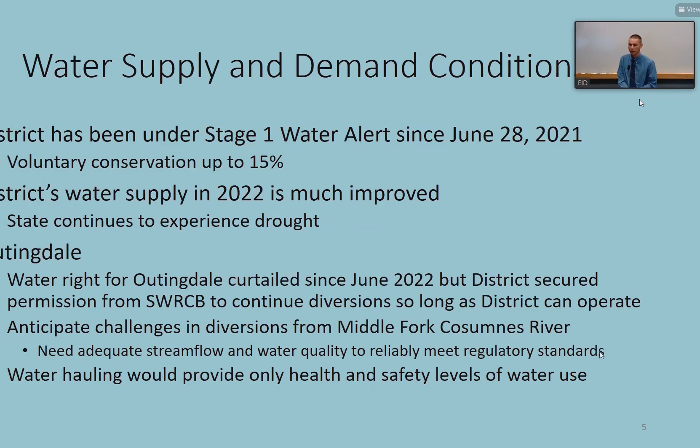So stage 1 alert has initiated public awareness of possible water shortages and encouraged water conservation with a target of up to 15% voluntary demand reduction from 2020 levels. We do continue to make progress towards this goal, and at this time we have sufficient water in storage to meet demands and carryover targets. Next slide, please.

Outingdale, on the other hand, has had its struggle and continues to be at the forefront, as the middle fork of the Cosumnes is its only water source, and there are no flow impoundments upstream. We have no dams or diversions or way to add water to that system. River levels may continue to drop until diversion is precluded. Water quality is the main source of concern at this time, which I'll get into in a few slides. We are requesting the board authorize the general manager to declare a stage 4 water emergency when necessary.

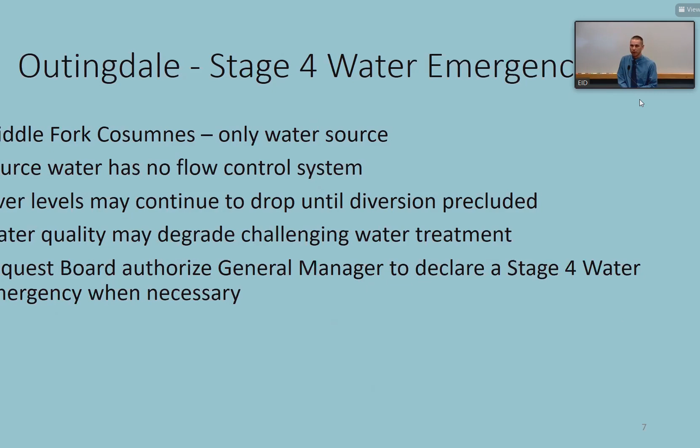Patrick, I was under the impression that the releases from Jenkinson Lake actually could help with this issue. Is that incorrect? Dan, do you want to talk?

Good morning, Patrick. Still getting his mental watershed map oriented. While Patrick's managing the technical aspects, I could talk to the policy level aspects. That's your question, Director Dwyer.

The way that the Jenkinson Lake storage is assisting the district is that, unfortunately, those releases come into the North Fork, and we're on the middle fork of the Cosumnes, so we're one watershed over. But by making those releases, we can continue to divert water that's physically available because there's no intermediary downstream beneficial users impacted by us. Unfortunately, we can't quite push the water through that watershed. So we're effectively trading water, if you will, in accordance with state water resource control. So in effect, we're not helping the Middle Fork, but we're helping further downstream. Exactly. And so that's the trade-off with the agreement we got.

Right, and we've obviously, as you know, looked many times at trying to extend that line, but it's very costly, not to mention the water quality challenges. So it's a matter of trading physically available water for that downstream confluence location. Thank you very much for the clarification.

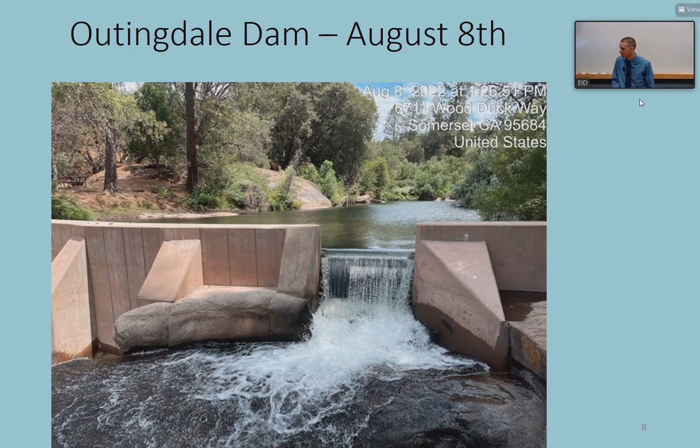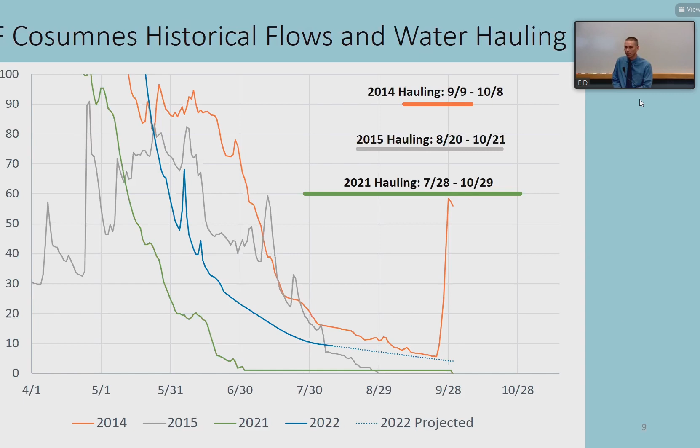However, one of the challenges that we are seeing already is the source water quality is deteriorating, albeit no more rapidly than it has been historically, but it's something we're being mindful of, and we're working with labs to actually pull routine sampling on a weekly basis to help us do a little bit better predictive modeling.

What in particular, is it the mineral content? Is there byproducts coming from the shore? How is it affecting the quality?

Yeah, the quality has been primarily, historically, coliform, and that's been kind of the trigger we've been monitoring at this point. We are monitoring TOC, total organic carbon, as well, but we're still probably leaning that it's going to be the coliform.

Right now, we're above the detection limit at the current lab. We're working on getting a secondary lab involved to hopefully give us a better quantifiable number, because when you get to the reporting limit, they stop, and then ultimately it's just a flat line at that point. It's not really giving us any additional information, so we're working this morning to try to find other labs that will help us get better continued results.

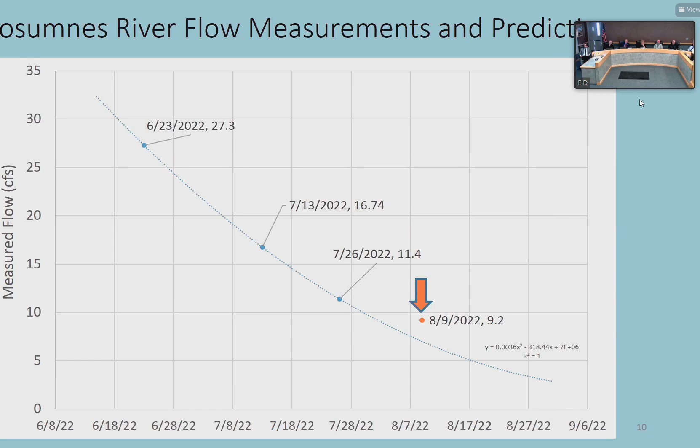Right, so we can try to track it and proactively determine when we're going to need to haul that water, so we're not calling at the last minute to the water hauler, and hopefully give them enough of a heads up so they are available to us the next day. We'd like to avoid that with the predictive modeling.

And is this you, Patrick? That's what I was going to do, fill in a little time while we work out the IT issues here.

I think it's important just for historical context, every time we do get these low flows, this is expected. So I want to make sure that's clear to the board, and it's expected by staff. They know this will be a challenge. Anytime flows slow down, you've seen creeks, we just start to get this normal development of algae and bacteria. So this is a normal, anticipated water quality challenge that staff are following very closely.

So Patrick will make the call. It's a matter of sufficient water quantity and sufficient water quality. When we came to you earlier this year, we were thinking it was going to be water quantity that was the limitation, but now, more than likely, it's going to be water quality, but that's where Patrick will make that call when we do initiate hauling.

You've already approved that contract. Our local vendor, as you mentioned, is in place, so we're ready to go when necessary, but it is about $1,000 per day every day that we do haul. So as long as water is physically available in accordance with approval from the State Water Resource Control Board, the General Counsel, it's definitely in our interest, provided we can continue to meet public health and safety needs.

So, and that's all I can fill in. I apologize, I tried to do the best I could.

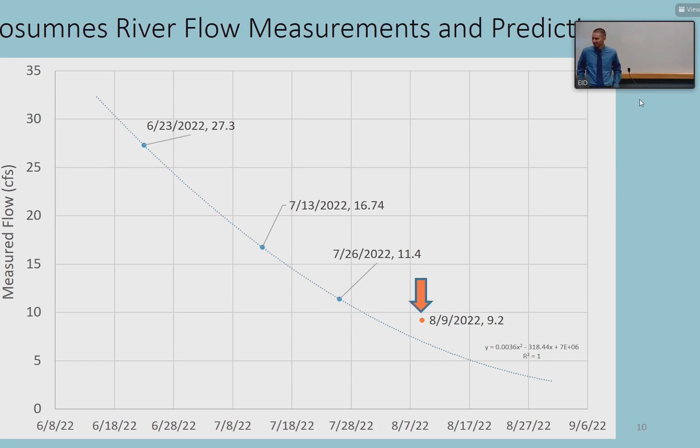But still, continue to talk.

In May of 2022, for the Outingdale public outreach, the district commenced a community outreach letter itemizing the upgrades done to the facility, as well as the potential need for water hauling due to the ongoing drought. On August 12th, 2022, a letter and email were sent notifying customers of the conditions, as well as requesting board authorization for Stage 4 and requesting customers take appropriate measures in advance of anticipated use restrictions.

Subsequently, we drafted an implementation letter. If Stage 4 conditions are triggered, all customers will receive a letter and email notifying them of the use restrictions that are in effect.

Those restrictions would require a Stage 4 water emergency, greater than 50% reduction, prohibiting automatic sprinklers and only allowing drip or hand watering with a shutoff nozzle. The health and safety water allotment given by the Department of Water Resources is 55 gallons per person, and there is one small farm that will have a requirement for 65% reduction.

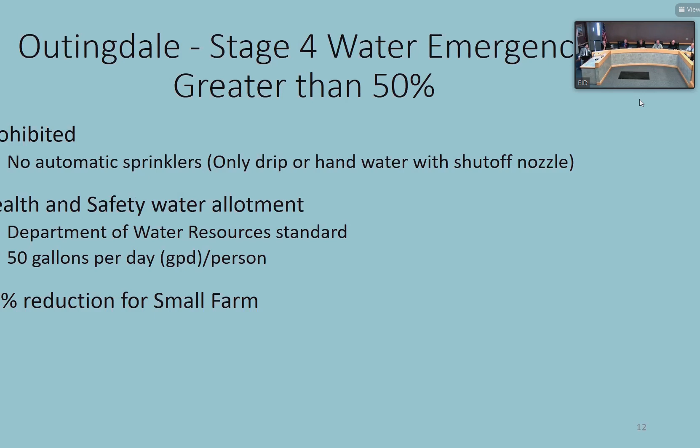Thank you. And I have a question as well: have we received any feedback from the community, any of the community members, in our initial outreach? I have not heard anything myself. You haven't, Dan hasn't either. Okay, thanks.

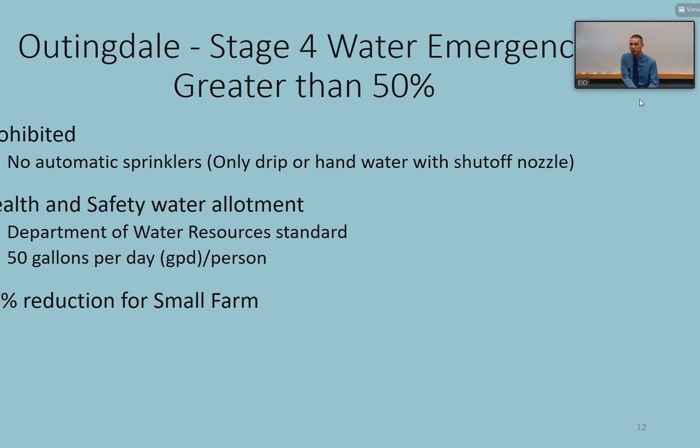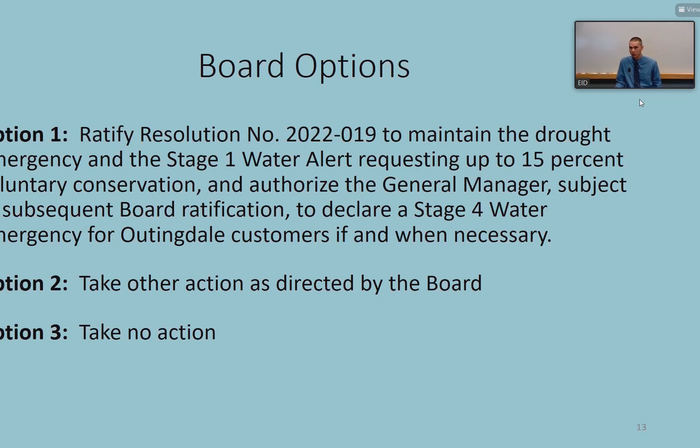Board option to ratify resolution number 2022-019 to maintain the drought emergency and Stage 1 water alert, requesting up to 15% voluntary conservation, and authorize the general manager, subject to subsequent board ratification, to declare a Stage 4 water emergency for Outingdale customers if and when necessary.

Recommendations, option 1. Just for the record, customer service weighed in and said they have not received any calls in the customer service area regarding Outingdale either. Perfect, thank you. Any questions from the board?

Yes, I have a director comment. I'd just like to recognize our PR folks, Jesse and Patrick, and the water group for the outreach and for being as transparent as possible on this issue. Thank you very much.

Before we have much further discussion, can we have a first and a second, unless you have questions? Yes, I'll move approval. I'll second. Motion by Director Veerkamp and seconded by Director Dwyer. I'd just like to add that Jenny Downey's staff were also a big part of that communication outreach.

Absolutely. Okay, now there's a motion on the floor. Public comment or directors? If members of the public would like to address the board during any public comment period in this meeting, please refer to the detailed instructions on page 2 of today's agenda. This is the public comment period for action item number 7, option 1, moved by Director Veerkamp and seconded by Director Dwyer.

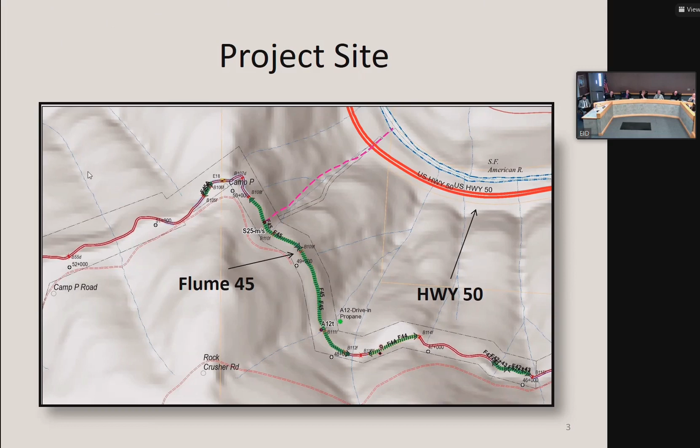So the summary is that Flume 45, Section 3, has some degraded areas, and some of the videos or pictures will show what we're mostly concerned about. There was a section stabilized in '91 by PG&E, where they brought in steel I-beams. We'll see pictures of that and how it works into our project. We're trying to get this ready for the 2023-2024 construction season. I'll go into more detail on the aggressive schedule we have for this flume section.

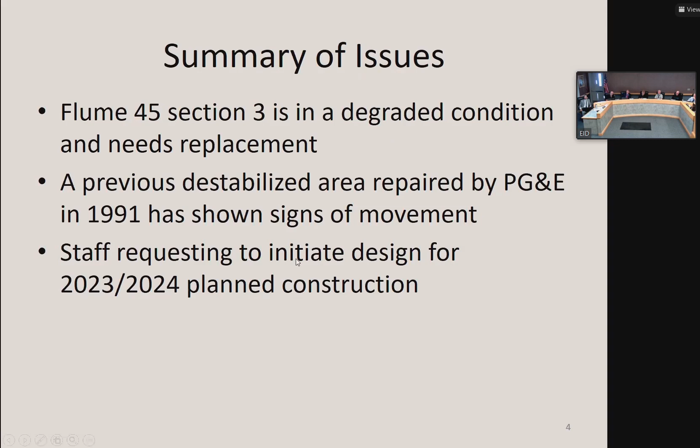So a little background: Flume 45 overall is around 1,900 feet long. It's our second longest wooden flume currently. Section 3 had some replacements in 1991. Most of this section of flume is on the historic 1870 rock wall, a rather big rock wall on the part we're concerned about. There's one section that has a significant slide area, and that's what we're really working on.

Stability measures were implemented in '91 on that 30-foot tall rock wall section for the whole flume. This project is going to require approval from the U.S. Forest Service and the State Historic Preservation Officer. Brian Deason will go into a little bit more detail on that slide shortly.

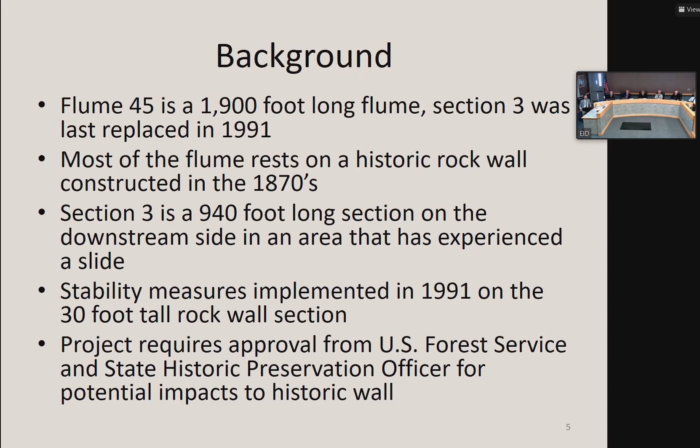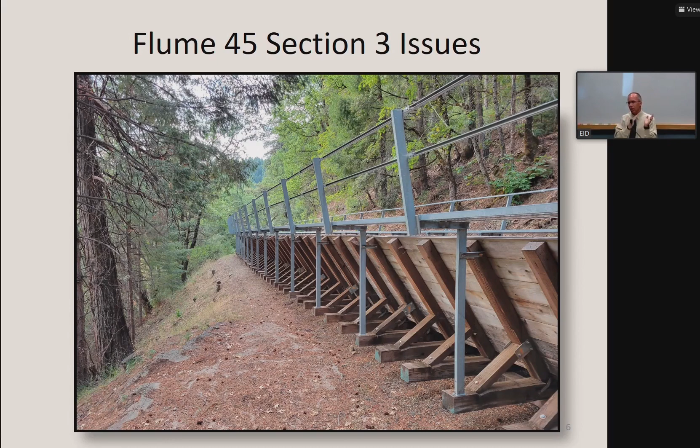All right, so here's what we're looking at. This is the downstream portion, from the spillway down to where we go into an earthen canal. This stuff is in still pretty good condition, but since we're here touching it, we're going to do some improvements. This section is where we envision a bench to go in. We have one just downstream, but we're going to improve that, hopefully go to a U-shape, move it over, and be able to get to our spillway when we need to do work.

This is the troubled section right here. The beams you see next in the picture are the spillway, the steel columns — that's the stuff PG&E did in 1991. I've got another picture that shows exactly what's going on there, a bit more on profile. You can see the bulge in the rock, similar to what we had on the abutment section.

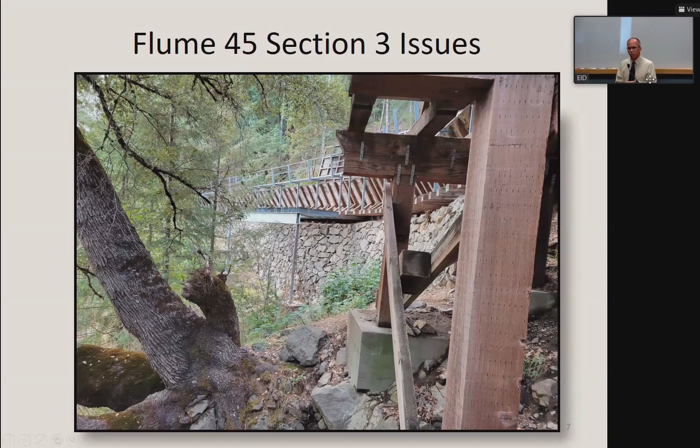Just above it, you'll see some retaining wall. Let's go to the next picture so I can get into more detail. This is what's going on underneath the spillway. We do have leaks in this canal, and you can see where some of the wood is beginning to experience dry rot. We need to get in here and get that done — the timbers are directly on the ground.

That will get resolved and elevated so we don't have that issue with degradation of the timbers. You can see some parts of the spillway underneath — right there, you can see where the wood is degraded even further. Next slide.

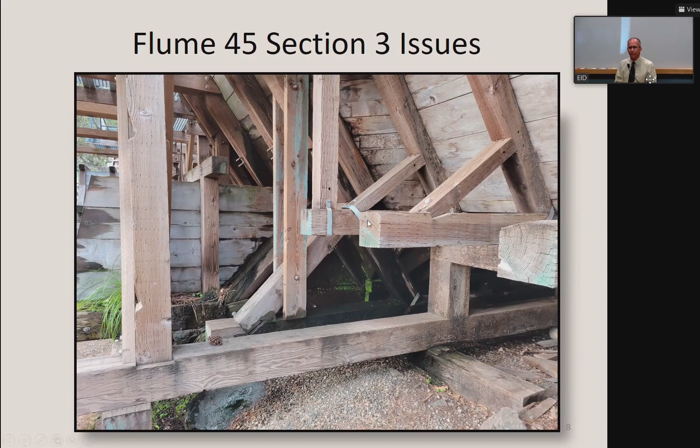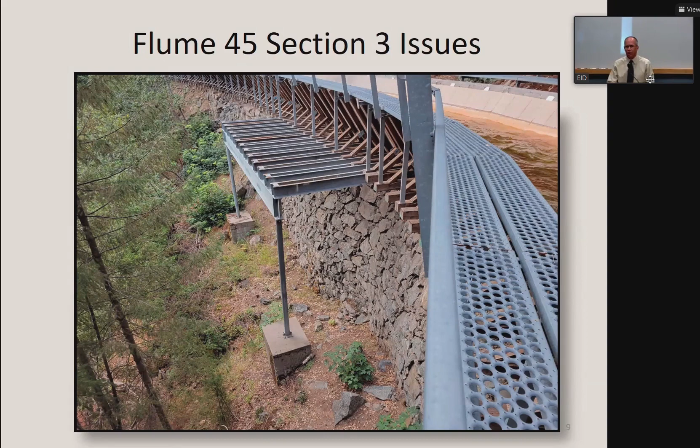Right in this area, this is where we're seeing that rock bulge again, and that's the concern, because we don't have the protections in place for that. That's what this project is addressing — getting that taken care of. If I could reiterate, the concern is if that bulge gets worse and the rock wall gives way, that's directly down onto Highway 50. And the flume would — yeah, that's when the flume gives way.

The other portion we're stabilizing — again, PG&E in '91 put this structure in right here. We're kind of perplexed why they did this, but it's steel I-beams with wood behind it, and now all that wood is deteriorated, especially on this portion. You can see large holes in this part and this section — right here you can actually put your hand right through that. So it will be about stabilizing this hillside so we don't have that coming down and wiping out the flume.

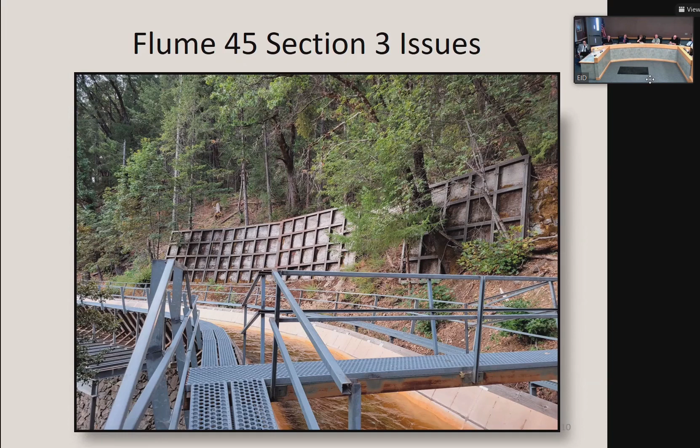For the remainder of the upstream portion, we've got this kind of example. This all goes in and out of the historic rock wall, and it varies from maybe 2 to 3 feet to maybe 5 or 6 feet. But again, it's that historic rock wall — this will all get put into the U-shaped channel.

The nice thing about this project is we're not building access — we have an access road right here that goes down to our propane tank. So the beauty of that is we can put the concrete pumper truck right there and do our spraying without having to build another access road, which is a good savings for us. It moves everything over, and again, we're trying to limit those MSE walls as much as we can. But all this is going to get shaken out in the design when we get going.

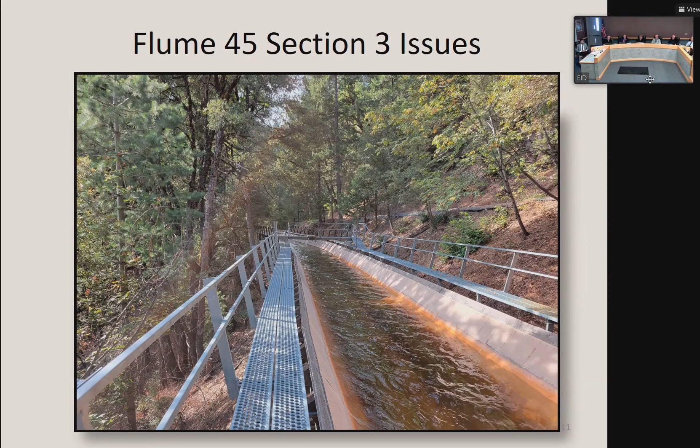So, scope of work: we've got to develop replacement and stabilization alternatives for the historic rock wall — that's what we'll be taking to SHPO. We're going to need consultation with the Forest Service, and Brian Deason will get into more detail on that. We need to do a geotechnical analysis of the site, which also means doing some bores on that rock wall to find out what's behind it and see what we can tie into.

Then we'll finalize that design. We're developing this right now for the 2023 and 2024 outages, so it's going to take two years to get this project done — 940 feet is more than we can do in one. So we need to get that phasing figured out. How that looks, we don't have an idea yet — do we just tackle that big, tall rock wall section? Where's the break point? That'll be up to the designers to give us that and how we're going to do it.

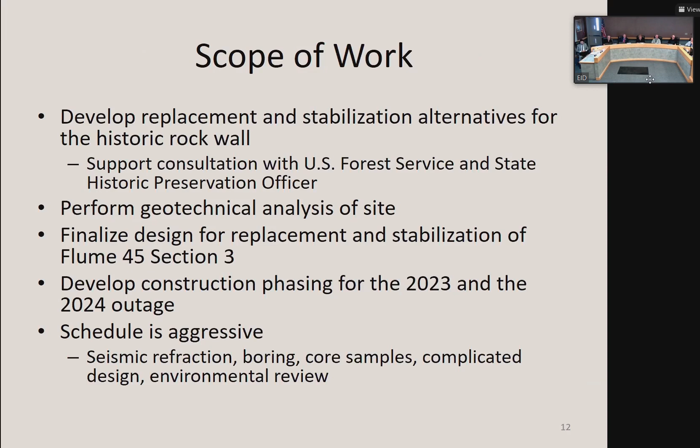Our schedule is very aggressive — again, Brian Deason will talk to some of that. But we've got to get the seismic refraction, we've got to get the borings. The design on that wall section isn't your typical thing, where you just get an MSE wall in there. So all that needs to happen, and then the environmental review.

For our proposals, we had 5 firms go out to look at the site. We got 3 proposals back. All these companies have worked very well with us in the past.

All have done flumes within the last few years. GHD, of course, has been very instrumental in getting our stuff up and going after the Caldor fire. They are our low bidder at $421,000.

And so with that, I'm going to turn the time over to Brian to go over the environmental aspect. Okay, I just have one slide.

Good morning, Brian Deason, Environmental Resources Supervisor for the district. I'm here today to provide the board an overview of our plan for complying with the California Environmental Quality Act, or CEQA, for this project. As with other flume projects, this project is subject to CEQA.

This project is unique in that it sits atop a historic rock wall, and this historic rock wall is considered a historic resource under CEQA. It's historic because of the quality of craftsmanship associated with its design and construction.

As you can see from the photo Carrie showed, that rock wall has been there for 150 years, and it's now just starting to show some bulging.

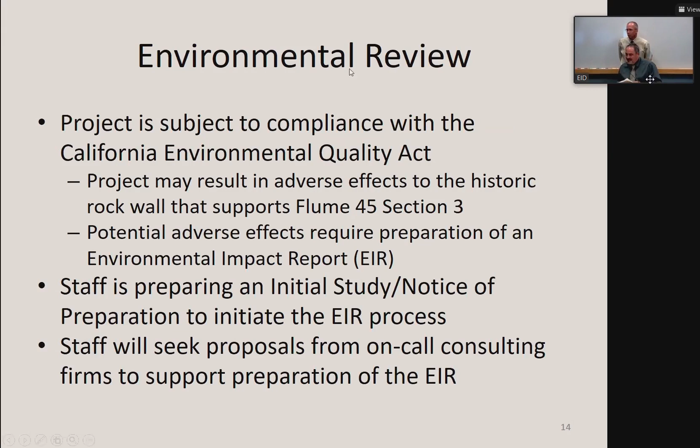All right, next slide. So the cost and funding for the design: we've got GHD's contract for $421,000. I've calculated the capitalized labor at around $155,000.

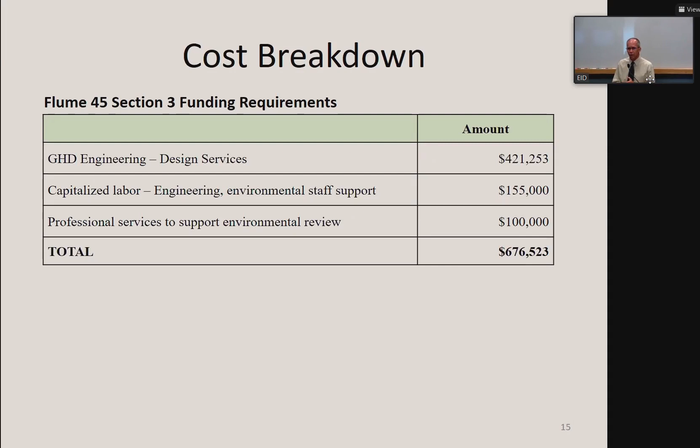And for the professional services for the environmental review, the EIR, it's going to be around $100,000, bringing the total funding for the contract to $676,523.

Next slide. So, board options: Option 1, award a contract to GHD Inc. in the not-to-exceed amount of $421,253 for the design of Flume 45, Section 3.

And authorize additional funding of $155,000 for capitalized labor and $100,000 for professional services for environmental support, for a total funding request of $676,523 for the Flume 45 Section 3 replacement project, project number 22014.01.

We recommend Option 1. I'll move Option 1. Okay, so it's been motioned by Director Dwyer, seconded by Director Osborne to move forward with this.

Item number 8, now discussion. Okay, thank you, Director Anzini. It seems like a really, really aggressive schedule.

Yes, because with all the issues that could present themselves, already evident, and other things that could come up, it looks like we'll have to have the design finished by the April-May timeframe in order to go out to bid.

For the actual construction. The resumes are impressive from GHD, but everybody said they were good—they didn't really say they were fast.

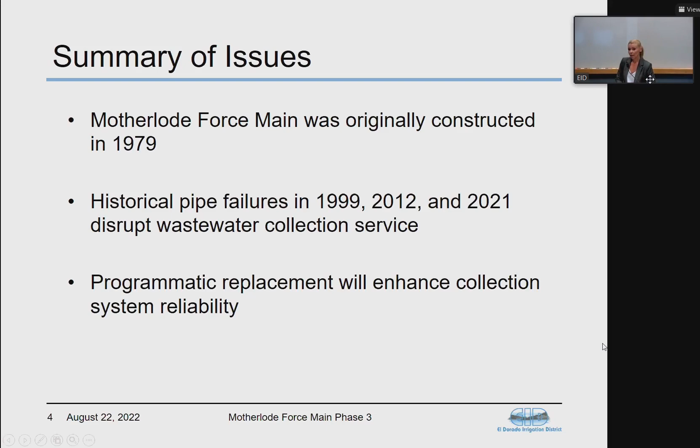Summary of issues: the Motherlode Force Main was originally constructed in 1979, consisting of 12-inch asbestos cement pipe. The district has witnessed historical failures in this pipeline in 1999, 2012, and 2021. All of these pipe failures have disrupted wastewater collection service. Therefore, programmatic replacement will enhance overall system reliability.

The Motherlode Force Main is a 40-year-old, 9-mile conveyance system, 8 miles of which is a force main under pressurized flow for raw wastewater. This pipeline services the town center force main and the upstream 3 lift stations, as well as a cluster of 8 additional lift stations to the east. Raw wastewater flows from El Dorado lift station to Deer Creek wastewater treatment plant and has a peak flow capacity of 2 million gallons per day. To date, approximately 50% of the pipeline has been replaced with corrosion-resistant plastic pipe.

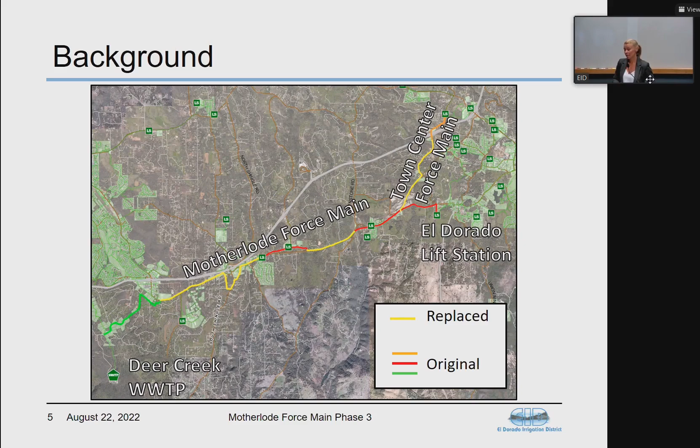Just upstream of the Motherlode Force Main is the El Dorado lift station. This facility has WDRs, or waste discharge requirements, set forth by the Regional Water Quality Control Board. Within those WDRs there is a northern equalization pond, used for temporary emergency storage only—typically during excessive rain events or failures in the Motherlode Force Main.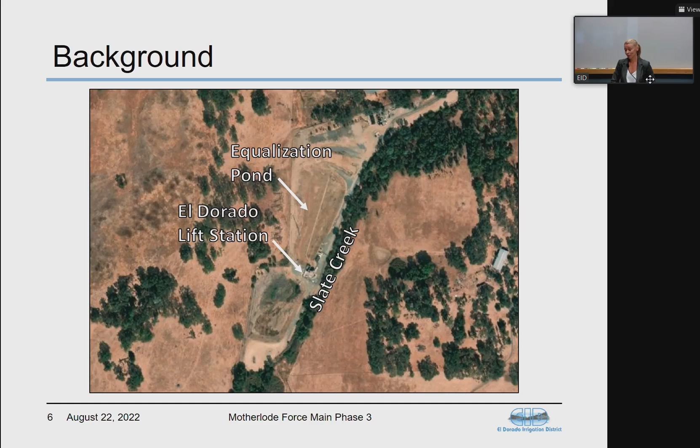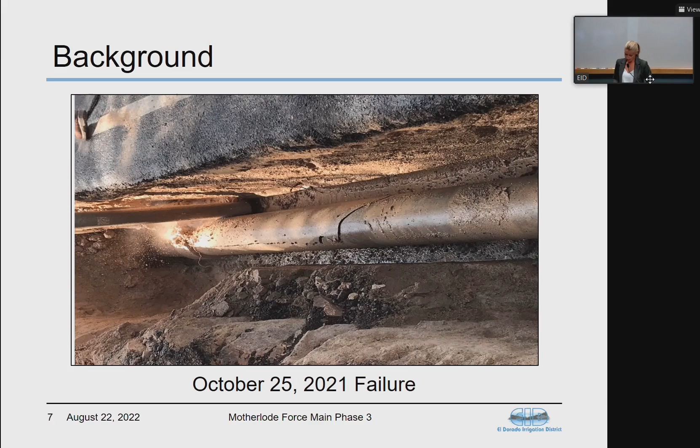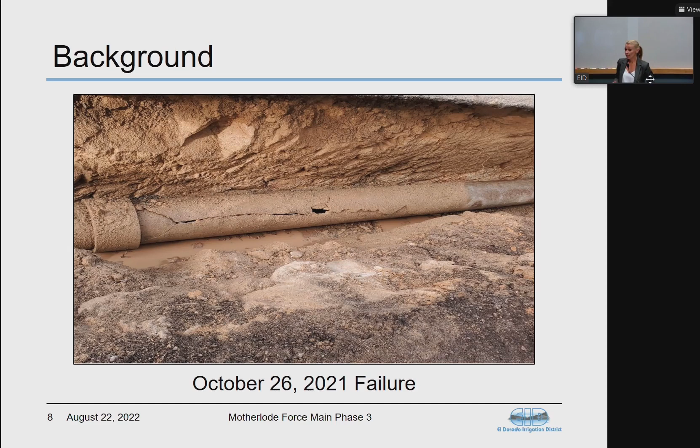Most recently, we had 2 failures back-to-back, unfortunately a day apart. This was just several days after a 10-inch rainfall within a 36-hour period in October. We had a spiral fracture for the first failure, then the second failure the next day—a longitudinal fracture occurring 2 pipe segments upstream. District staff enlisted the assistance of Doug Veerkamp General Engineering to perform these repairs. Both failures occurred during high flow when the high horsepower pump at El Dorado Lift was in service, and both resulted in a Category 1 SSO, a release of wastewater. Luckily, the wastewater did not reach surface water drainages.

During the repair process, our wastewater collection staff had the opportunity to launch a closed-circuit television inspection camera within the pipeline. On the left is an example of corroded pipe, and on the right is non-corroded pipe. For about 200 feet upstream there was corrosion, and then luckily we were able to see some non-corroded pipe—light at the end of the tunnel. Unfortunately, downstream we did not find non-corroded pipe. We reached a time crunch where the pipe was ready to be put back in service, so we couldn't continue with the television inspection, but I think we got enough documentation to make a good decision moving forward with the scope.

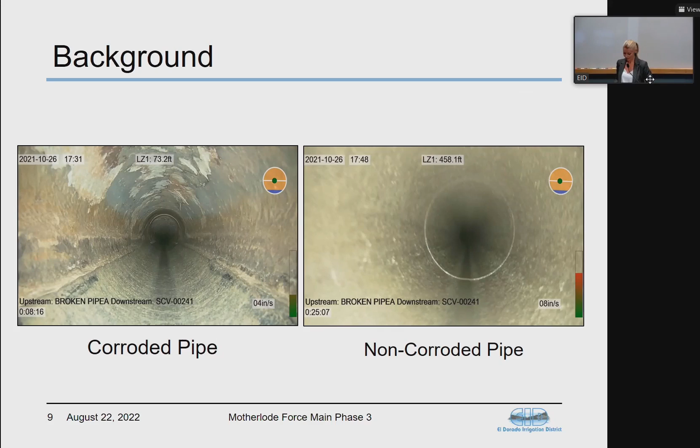So moving forward, staff enlisted the help of Domenichelli and Associates to design improvements for 3A, 3B, and 3C of the Motherlode Force Main. I did want to call attention to the most downstream segment. On the left side of the screen, you'll see a green pipeline that I'm not discussing at this board presentation, but it can be identified as the Strolling Hills pipeline, which is also included in our CIP. So a little bit of foreshadowing there.

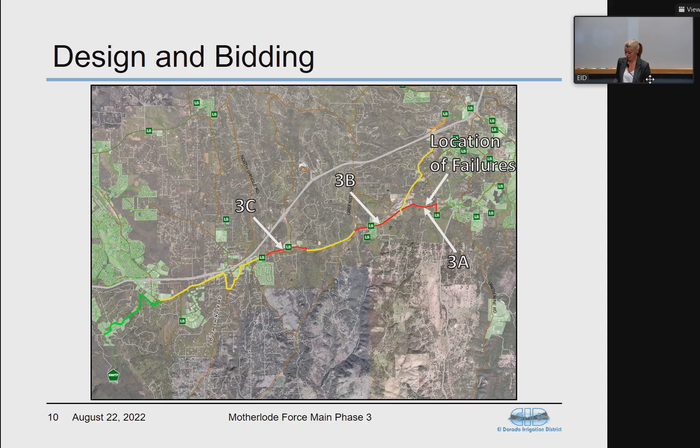As we were going through the design of these 3 segments, each about 1 mile long, staff discovered 2 creek crossings, one on 3B, one on 3C, and unfortunately those creek crossings require a little bit more analysis before we go out to bid. So staff decided to pivot their efforts and focus primarily on 3A and get that out to bid in an attempt for a 2022 construction season. Next slide.

Unfortunately, things didn't quite go according to our plan. Those bid documents were released in May of this year. The pre-bid meeting was very well attended, but unfortunately only 1 bid was received. That bid did have an elevated unit price - typically we'll see $400 to $500 a foot for planned replacement, and then emergency replacements are about $1,000 to $1,300 per foot. Unfortunately, this bid was a lot closer to the emergency unit price, and so at that point we decided to reject all bids and pivot back to a different process or mindset.

So moving forward, staff decided to repackage the construction bid documents to include all 3 segments and work on those environmental efforts at the same time. By packaging the 3 miles together versus just the 1 mile, we're really hoping to get a greater economy of scale. Also, when we release these bid documents early in the 2023 calendar year, hopefully it's more ideal for the construction season. Some of the feedback we received when soliciting 3A was that it was later in the construction season, so unfortunately those construction companies already had their resources allocated to other projects. I did want to mention too that this bid package will include a modified bid form, so we'll separate out 3A, 3B, and 3C so that if we run into the same situation with an elevated unit price, we can have a discussion of whether we want to award all 3 segments or if we have to scale back and just prioritize.

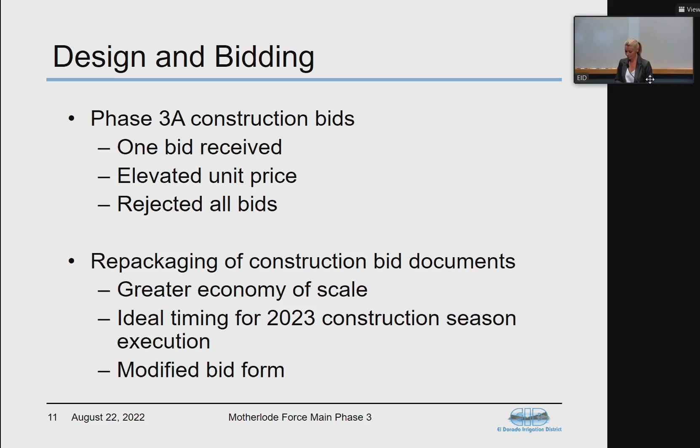So at this point, we've come a long way of just seeing what's out there, seeing what's in the sandbox. It's quite an historic area, so there's a handful of items that we'll need to incorporate in the design drawings: utility conflict relocation, wastewater service connections. We've seen some atypical connections, and during this project we'd like to correct those and make them right. Also incorporate any environmental mitigation measures, if any come up. Also vehicle turnouts for our air release valves - this will give our staff ample opportunity to safely navigate off the travel path and then service those air release valves.

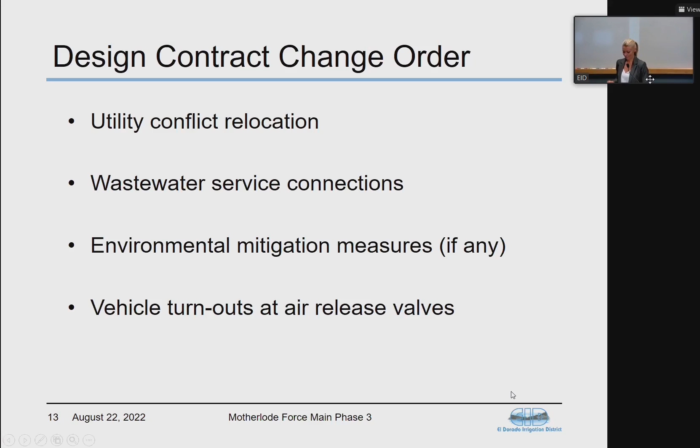The initial design contract was for $74,000. We've had one amendment for traffic control plans. Today I'm speaking to you regarding Amendment 2. So the total contract amount is still within the General Manager's authority, but we are very, very close, which is why I'm here today. Alright, next slide.

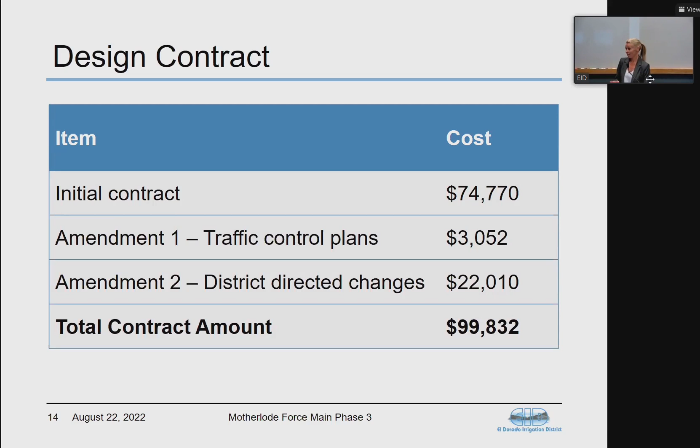Before we go to construction, staff will execute a public outreach plan. Elements of that plan include a courtesy notice, email notification, and a project webpage. And with the traffic control set up out there, we'll have boards that will be well seen in the right-of-way.

All right, next slide, funding. This project was identified in the 2022-2026 budget. We had about 2 miles of pipe before we saw some increases in market pricing. So I'll be working with our engineering folks to refine those estimates and include updated estimates in the upcoming CIP.

What's the current ballpark for the whole project? You know, I thought that question might come up. The last time we did Mother Lode force main, it was $400 a foot, and that was in 2013, 10 years ago. I don't think we'll get close to that emergency unit price, but I'd imagine we'd go up $200 to $300 a foot, so maybe around $600 to $700 a foot. I hesitate giving a defined number because our design engineers are still working on an estimate right now. Maybe 10 million-ish, in that ballpark, maybe a little bit more.

Board options: Option 1, approve a contract change order to Domenichelli and Associates in the not-to-exceed amount of $22,010 for design of the Mother Lode force main Phase 3, and authorize additional funding of $22,010 for the Mother Lode force main Phase 3, project number 21081.01.

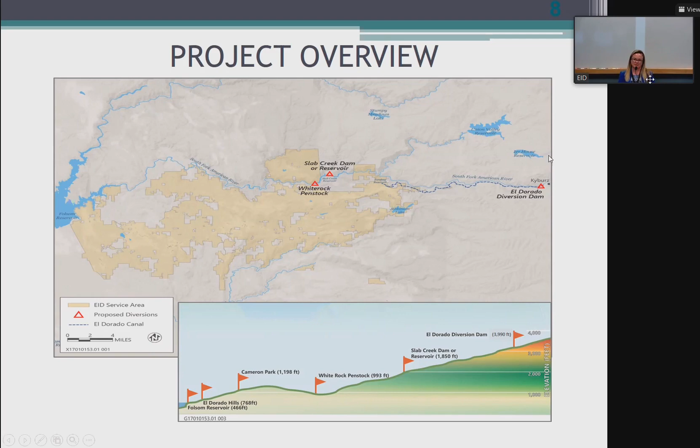Next slide, please. So what are we seeking to accomplish with this project? First and foremost, our primary obligation is to meet the future water demand of our customers. Our long-term water supply planning documents indicate that particularly where we're seeing the largest areas of growth, this is going to be an important water supply to meet those future demands. So we want to have the flexibility to utilize this right for those areas of growth moving forward.

With any water right, we're seeking to optimize our existing water rights and ensure that we're beneficially using our existing rights. And so with those additional points of flexibility, we'll really have the flexibility to get the full benefit of this right in the near term. As I alluded to, we are looking for more of a gravity-fed conveyance system where we'll see the energy and cost savings associated with that. And I think the last couple years is probably a very good indicator that having flexibility, reliability, and drought resilience is going to be ever important in the future.

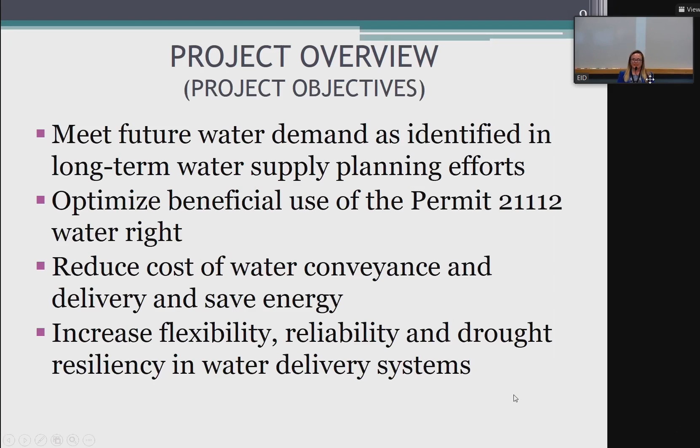So now moving to the project status, we have been at this project for a couple years now. It's a complicated project, and in particular, the hydrologic modeling that we're performing really is the foundation for this water rights project. As you can imagine, once you're talking about diverting water at different locations in an existing system, you need to be able to model and show how that system will behave with those proposed diversions. This hydrologic model will serve as the foundation for both the water rights change petition process as well as the environmental review process.

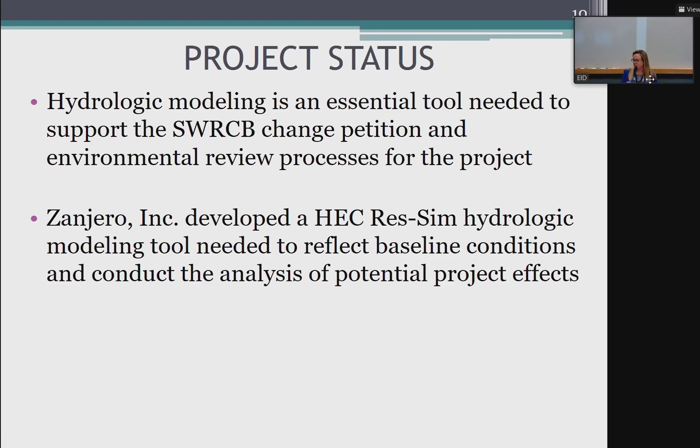Our modeling consultant, Zanjero, looked for ways to gain efficiencies by looking at existing models that were already basically on the street and seeing if we could essentially use that as a starting point for efficiency in this effort. What they developed is called the HEC-ResSim hydrologic modeling tool, and they built upon an existing model, which I'll go into more detail on. This model will reflect both what's called baseline conditions - a CEQA term you might have heard - we need to reflect the existing conditions in the system, and then we also need to model our proposed additional points of diversion and those operations to see if there are project effects on the system. So it's a layered modeling effort.

In terms of what we started with as a starting point for the modeling effort, our consultant identified that there was an existing model developed for SMUD's Upper American River project, as part of SMUD's FERC relicensing effort back in 2005. The benefit is that this had already modeled essentially the SMUD side of the Upper American River system, so we had that piece to build upon and gained efficiencies from starting with an existing model. That's depicted with the upper blue being what we started with.

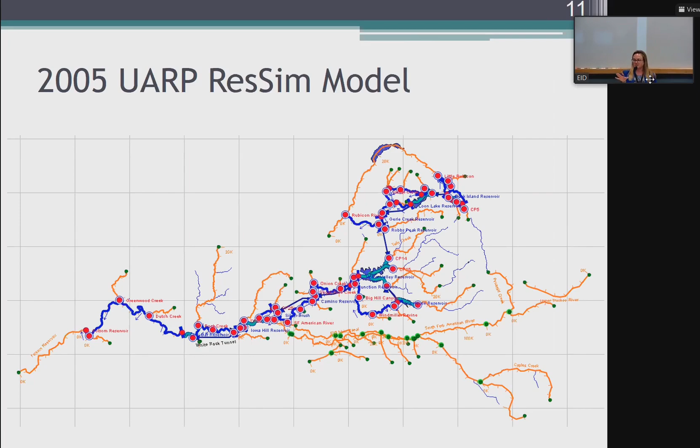The lower tan is essentially what we're influencing with our operations, which was not part of that existing model. So our modeling consultant is building out a complete operational hydrologic model that reflects Upper American River operations. This reflects our existing modeling effort, and we've built out all of the EID operations. You'll see all those red nodes are active components of the model where you can have specific data inputs and outputs. Hopefully this gives a feel for some of the complexity of this model.

Since we had a 2005 model to start with, our modeler also inputs the actual hydrology we've experienced since 2005. So we now have a model that shows how the system has behaved from 1975 to 2019, using actual hydrology as the foundation for this model.

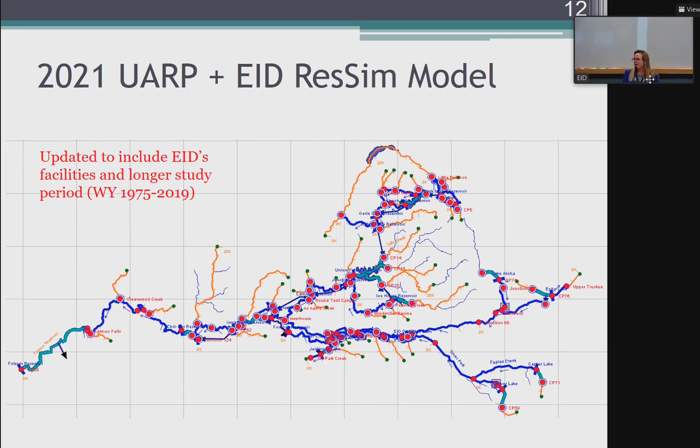So if we had the model, or SMUD had the model, and then we had recent experience since 2005, does it match with what the model predicted? It's a little counterintuitive how this model behaves, and I'll try to explain. Basically what we're trying to get the model to say is, if we had a year like 2005 with current operations, how would the system behave? You're taking current conditions and overlaying them with prior hydrologic experience. You're not actually testing against that prior year because it's current operations. So we're trying to say how the system would behave in a year like we've experienced previously, but with current conditions. There's not a true truth check comparing this year to prior years, but our modeler does a bunch of quality control measures and fine-tunes that, still checking how the model behaves relative to prior hydrology.

I know, this is an attorney talking about modeling.

It's my understanding from the modelers that the model is accurately depicting prior hydrology.

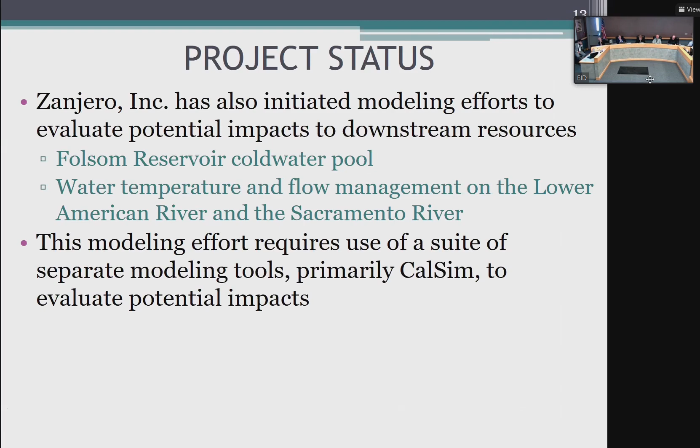I do want to emphasize the complexity and layered nature of this modeling effort. I'm not a modeler, but I've been close enough to this project to realize it's always more complicated than you think, and you discover things along the way. A huge part of this effort was compiling and updating the hydrologic information, so this is actual gauged information at various locations for the entire hydrologic period. That gives us the very foundation for building upon the rest of the model. We need to understand what historical hydrology on the system has been.

Once we have the hydrology, we then have to overlay that with the operational regime this system is experiencing. The SMUD part of this was essentially built out, but our operations were not, so we have a fairly complicated operational system. We've been working on building all the operational rules into that model—conditions of our water rights, when and how we can divert, information about our reservoirs, our storage, et cetera. So quite a bit there.

And then, of course, the last layer is what are we proposing to do? How would we divert? When would we divert? And what's the diversion pattern the system would see with our project? So hopefully I've conveyed that this is a complex and iterative process.

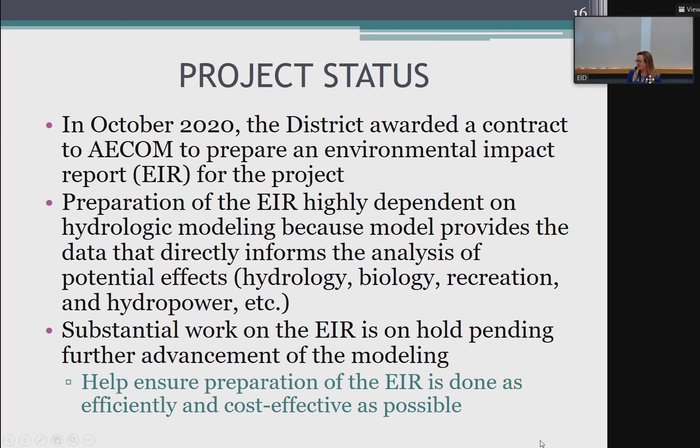So moving to today, what are we asking of the board? We are seeking a change order for the existing hydrologic modeling contract. What's causing this particular change order? There are several things. Our experience as we've moved forward with modeling is that...

We were utilizing the existing model that was developed for SMUD's UARP system. When we scoped this project, we assumed we'd be able to leave that piece of the model essentially untouched as an existing operational model. But through our stakeholder engagements with SMUD, they expressed concerns that it no longer reflected their current operations. In particular, that existing model assumed SMUD would be making additional discretionary power releases, but what SMUD has told us is that there are times when they're really operating under more of a regulatory regime, where it's just in-stream flow obligations.

There were some operational rules that we really need to modify to more accurately reflect SMUD's current operations, based on feedback received. So there is some work to be done on modifying those operational rules. That was not anticipated in the original scope.

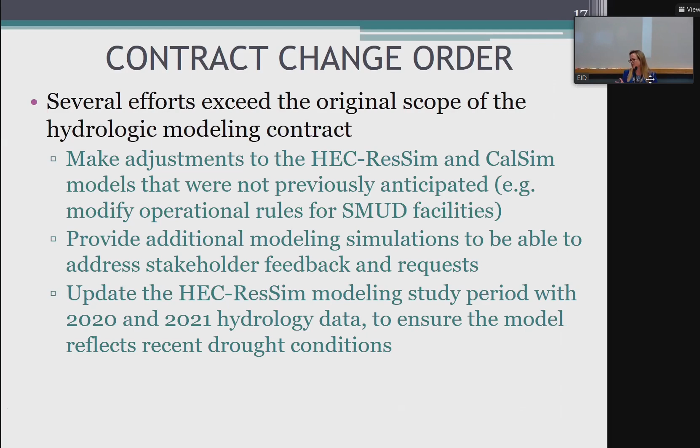In summary, we are seeking a contract change order with our existing contract in the amount of $174,100. In addition, we are seeking additional capitalized labor for my co-manager, Brian Deason, Environmental Resources Supervisor, to continue to support this project. That funding source will be 100% water facility capacity charges for this water rights effort.

Option 1 is to approve a contract change order to Zanjero Inc. in the not-to-exceed amount of $174,100 for additional hydrologic modeling services, and authorize additional funding of $30,000 for capitalized labor, for a total funding request of $204,100 for the permit 21112 change in point of diversion, project number 16003. We recommend option 1.

What's the timeline? Could you be more specific, for completing the model?

I would have liked to have estimated that based on the original scope, but we've experienced that it's more iterative than we imagined. For this particular baseline and project modeling, I think we're about 6 months out from having that fully dialed in. But then the modeling effort will continue to support the EIR. There will be additional modeling, for example, if we're looking at mitigation measures that would affect diversion patterns, or alternatives that would affect diversion patterns, then there would be modeling that corresponds to development of the EIR as well.